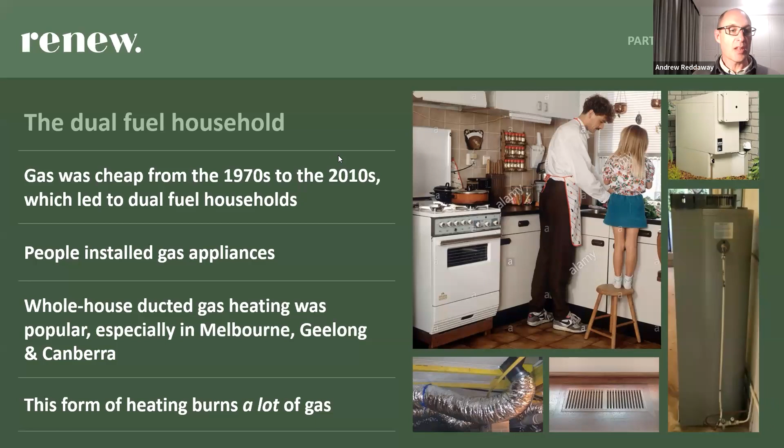So as I mentioned, Australia now imports almost all of its petrol, and the gas is now running out as well. So last winter, I think most of us are aware, there was a big energy shock in Australia with prices going up for electricity and gas for households and businesses. The reason that was most talked about in the media was geopolitical, so the war in Ukraine, all those sorts of factors. But an underlying factor is actually that the gas being produced in Southeast Australia is depleting, and there's not so much available anymore.

Also, we're exporting lots of gas, which is mostly from Queensland and New South Wales, which is not so easy to get down to Victoria when it's a really cold winter's day and heaps of gas is required. It's hard to suck that through the pipelines fast enough and down from the northern states.

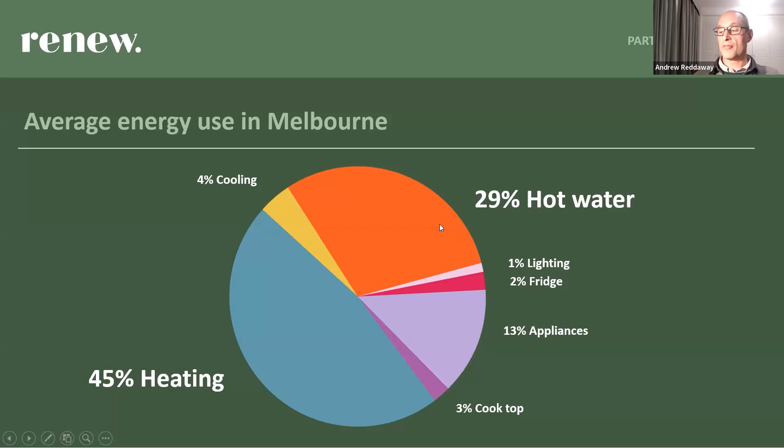But as a general rule, Melburnians would spend a lot of their energy for heating the home and cooling, not so much, but mostly heating. And also a reasonable proportion for heating their hot water for showers.

All right, so let's look at cost. So all electric homes compared to homes that use electricity and gas, what we call a dual fuel home. So yes, if you're choosing to go all electric, then your efficient electric appliances probably do cost a bit more to purchase and set up. But once they're there, the energy bills go down compared to a household that is using gas for heating and cooking and hot water. So over time, it generally is an economic choice to be all electric rather than dual fuel.

And it's not just because of the energy that's coming in through your electric cables and your gas pipes. It's also the supply charges. So even if you don't use any electricity, you still pay a supply charge just to have that grid connection. And the same with gas. And so if you look at that option of severing that gas connection, that could actually save you a few thousand dollars over 10 years, just for the right of having that connection, which is pretty significant. So Renew put together a report in 2019, which went into a lot of detail on this.

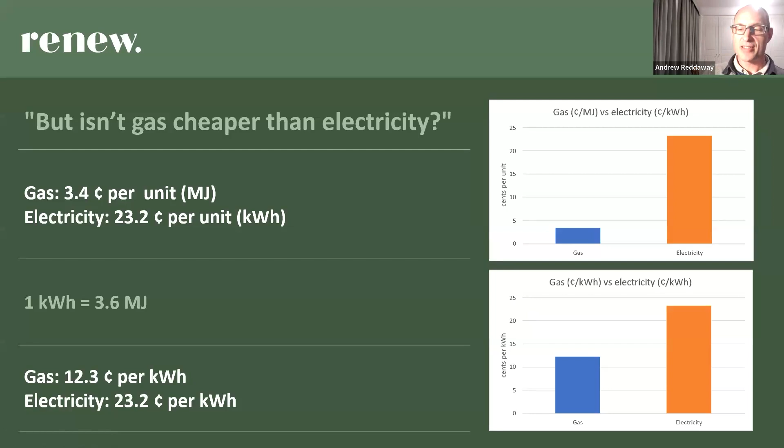Yeah, here we are. So the previous slide was only looking at per unit of energy coming in through your meter, but that's not what you really care about. What you really care about is how much heat gets into your home, either as hot water or as space heating.

So this is where the big differences come. If you're burning gas, then not all of the heat in that gas makes it into your home. You're always going to lose some heat that goes up the flue, or it gets lost into the air down the side of your house. On the other hand, with electricity, you don't lose energy. In fact, you gain a lot of energy, and I'll explain why later.

But you're effectively like 450% efficient with a reverse cycle air conditioner or a heat pump hot water system. It varies unit to unit, but roughly you're getting much more than 100% efficiency. I know it sounds like you're violating the laws of physics and thermodynamics, but it does actually work. I'll explain why later.

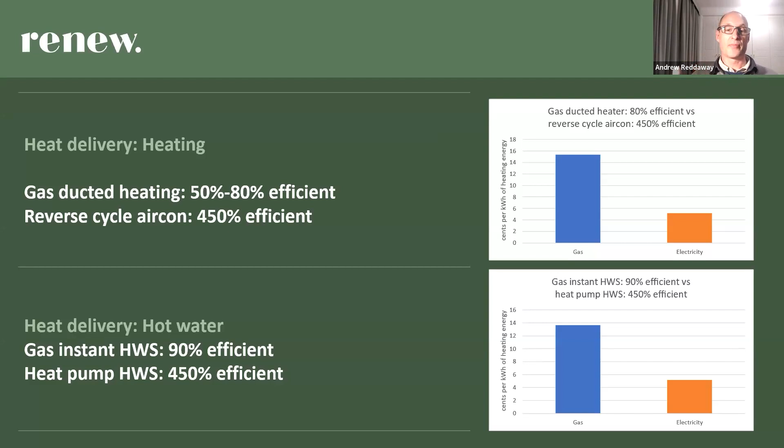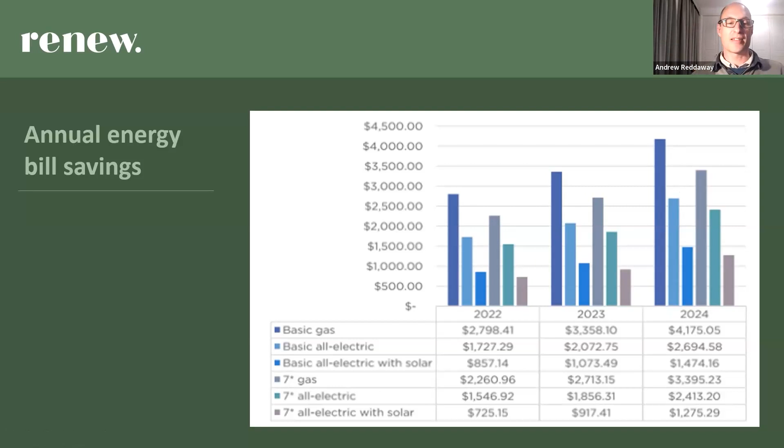And I think we're all aware that energy prices are rising, unfortunately. So these are some projections. For 2024, yes, gas is going to be more expensive. Electricity is also going to be more expensive, but you're still going to be saving with an all electric home compared to dual fuel. And in fact, your savings get bigger as both of those costs increase proportionally.

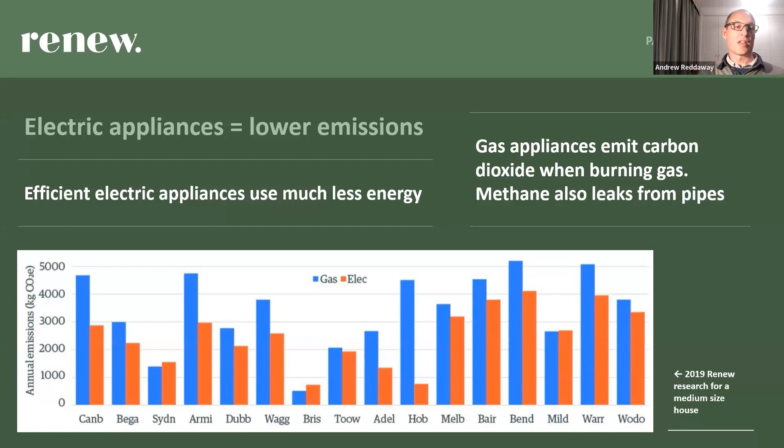Well, that's 2019, which is already 4 years old. And if you're installing an appliance now, that appliance is probably going to be there for 10, 15 years. So if you think about the lifespan of that appliance, what matters in terms of emissions is not just the picture now, but the picture throughout that lifespan. And things are changing. Gas is actually getting dirtier.

Previously we were sucking up gas out of a relatively small number of wells that were being drilled down into the seabed under Bass Strait. Now we're moving to unconventional projects, so that's coal seams and fracking. And we're talking much larger numbers of wells throughout all sorts of landscapes up in Queensland and in New South Wales. Comes with a whole bunch of environmental issues. So as time goes on, the emissions are going up per unit of energy from gas.

And electricity is getting cleaner. We've had Hazelwood Power Station closed down. We've had Liddell in New South Wales shut down just a couple of weeks ago. Eraring's going to close in a couple of years. There's been others that have shut down. So that energy is being replaced by wind, solar, energy storage.

If you install an electric appliance now, each year that it's operating, it's actually going to be running cleaner and cleaner in terms of emissions from the electricity that it uses. So if you compare 2030 projections to 2019, electricity from the grid is only going to be a little over a third of the emissions of what it was in 2019.

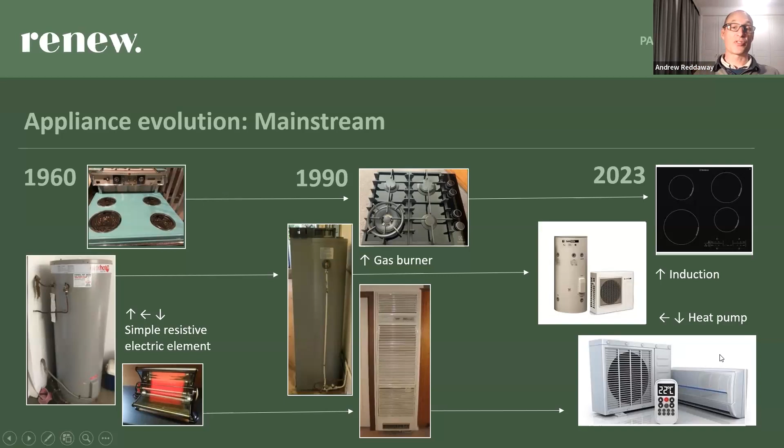And nowadays, what are the efficient options? We've got induction cooktops, and we've got heat pump technology for hot water and for space heating, just via a reverse cycle air conditioner. So heat pump, that's a bit of jargon. So what is it? Well, it's really this unit you've seen down the side of people's houses. Everything's down the side of the house, isn't it? So it's a heat pump unit. It's the outdoor part of a split system air conditioner.

And if you're using it for heating, which you can, it's using electricity, but all the electricity is doing is turning the machinery. You're not running that electricity and just burning it as heat. It's just spinning the equipment. So what the equipment does is it's sucking in air that's blowing around down the side of your house. It's extracting heat from that air and putting that heat into your air conditioner, so you can get heat into your home. So that's the opposite of what your fridge does.

So if you think about your fridge freezer in your kitchen, it's taking in air from inside the fridge freezer. It's extracting heat and blowing that out into the kitchen. So if you feel down the back of your fridge, you'll find that it's warm. That's the heat that's been taken out of the fridge freezer to keep your food cold. So a heat pump used for heating your house is doing the same thing, but in reverse.

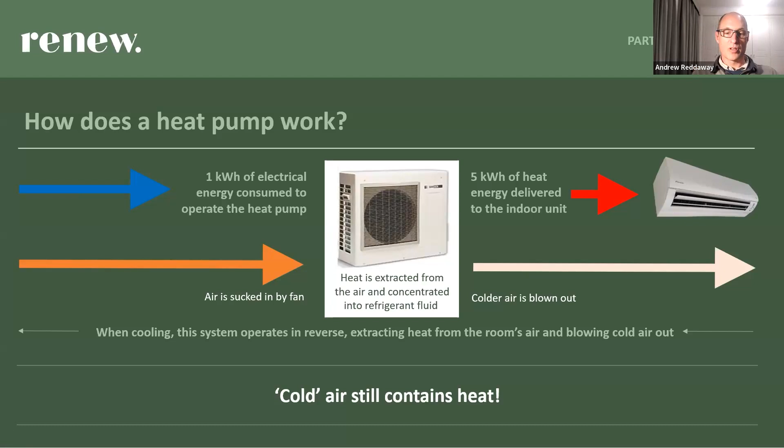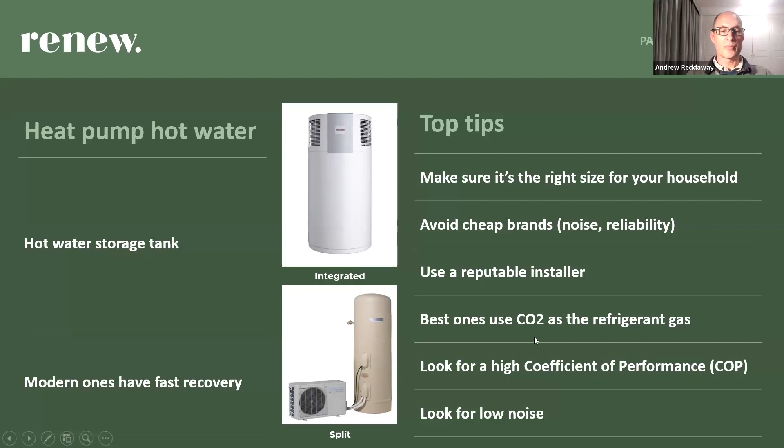So a split system air conditioner, you've got the inside unit and the outside unit, and you don't have ducts. You don't have air blowing through ducts. The heat's just being transferred through a thin pipe that goes through the wall, which is a much better way of doing it, because when you're blowing air down a duct, it takes a fair bit of electricity to run the fan to push it through, and you always have some losses. You have some leaks and gaps in the ducts.

Especially if you've got an old unit from the 1980s or something that's still installed, you'll probably find that the ducts are deteriorating, and you've got hot air blowing out in winter, cold air blowing out in summer. So you're actually trying to heat or cool the whole neighborhood as well as just your own house, which is a pretty tough ask.

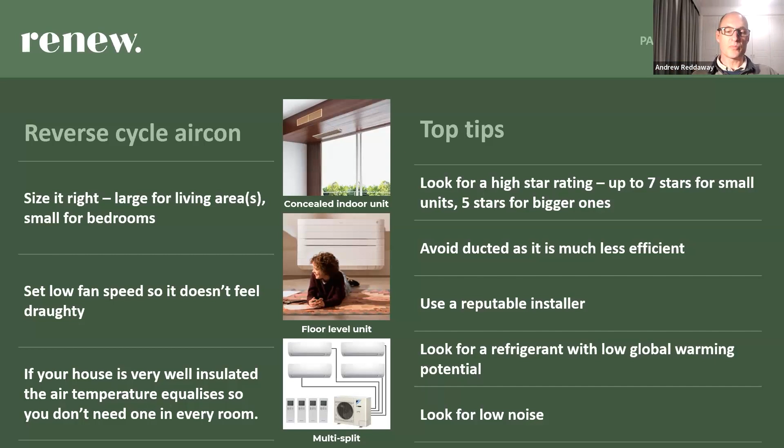And then induction cooking. So these are really good systems compared to the old style electric ones. They're really responsive. You can go from low power up to high power in a second. You've got really good control over the power, and it's actually heating the pot itself. So it's not really heating the cooktop; the cooktop only gets warm where the pot is sitting because it's only being warmed up by the pot. So safety is good, which can be important if you've got perhaps elderly people or kids that might be using the cooking.

Induction cooktop is powerful, and you don't have indoor air pollution. There have been some studies recently that have linked indoor gas cooking with childhood asthma, which is pretty concerning. You do have to make sure that your pots are compatible. The easy way to do that is to stick a fridge magnet on the base of your pot, and if it sticks and doesn't slide off, then your pot's going to work with induction.

Another consideration is you are going to have a dedicated new electrical cable connecting your induction cooktop back to your electrical switchboard. So that is going to require an electrician to do a bit of work. All right, so that's a rundown on the appliances that we'd recommend for efficient electric to replace gas options. So now let's talk about how you actually do it.

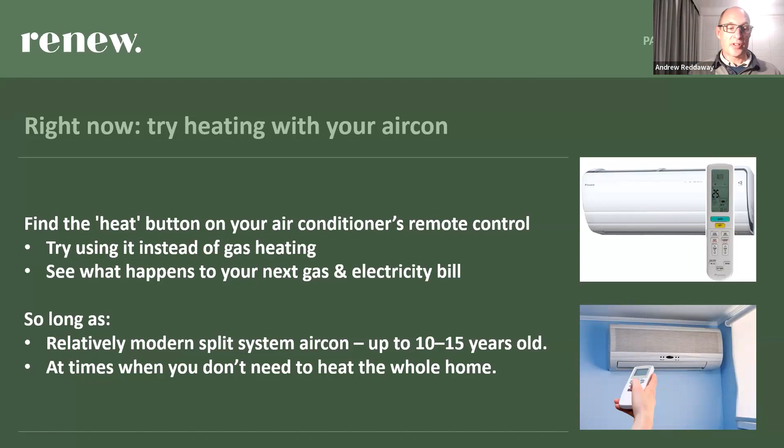Now, if you're building a new home or doing a major renovation, then really it's a no-brainer. Just don't put gas in. Just go all electric. And while you're doing it, make sure the insulation is good and the draught sealing. Any new home has got a star rating on it. Up to recently, the legal minimum has been a 6-star rating. That's going to change. The minimum is going to be 7 stars. That's as designed, by the way.

If the builders or the tradie subcontractors cut some corners and they don't put in the insulation as well as they should have, then even though it's designed for 7 stars, it may only perform as 6 stars or 5.5 stars or something. But if you're building new, try and get it well sealed, well insulated, and go all electric.

So Renew's done some research on this and compared the costs of adding that insulation and going for, say, 8 stars, compared to the extra bill savings over time. And it looks like 7 to 8 stars, if you're just looking at cold hard numbers for dollars, might be the sweet spot. You're accepting a bit of extra cost up front, and you're recouping that cost and earning returns through lower energy bills into the future.

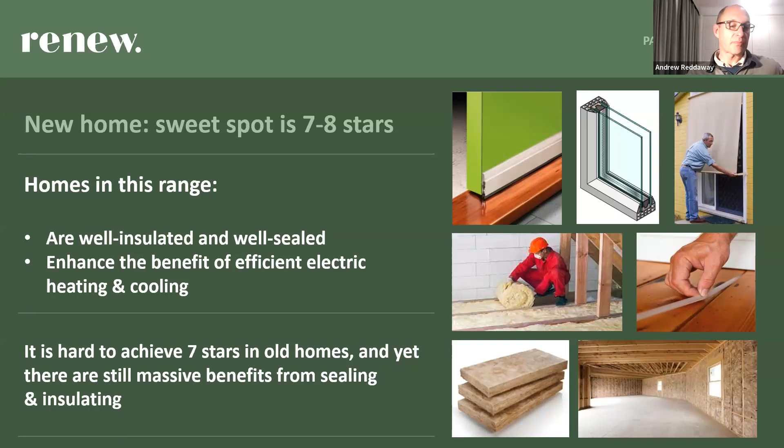Solar panels, really popular these days. Solar panels are so hot right now. And yes, they're great by themselves. They also enhance the benefits of getting off gas. Going off gas is great by itself as well, but when you combine them both together, you get even better effects.

You can go into this in heaps of detail, and we have entire webinars focusing on solar and home batteries. But the simple message is, as long as you've got a sunny roof and you're going to be staying in the home long term, then it's a good deal economically and environmentally to put solar panels on the roof. Once you do that, you're generating your own electricity, especially in the sunny part of the day, say 10 a.m. to 4 p.m. So that's when you would want to run your appliances as much as you can. Use your electricity.

Batteries, they have some benefits, but we'd probably still see them as a niche market at this stage. Still not economically compelling for most households.

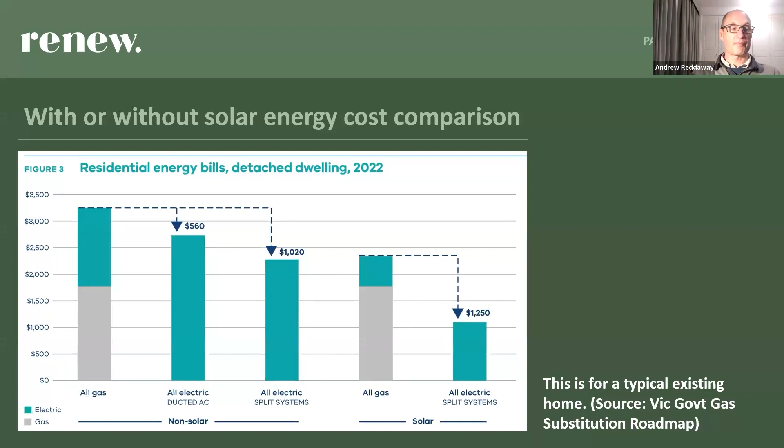Now, here's something to aspire to: closing your gas account. So once you've upgraded your appliances from gas ones to efficient electric, then it's time to call up your retailer that sends your gas bill and ask them to close your account.

Now, there's very different sorts of reports that we hear, experiences from different households. Some households, like my own, for example, we just called them up and said, "Oh, I would like to close the account." They said, "Yep, fine, close the account," and that was all that had to be done.

But there have been other cases, depending on the retailer that they're with and which location they're in, which company owns the gas pipes. Sometimes they are a bit difficult, and they say, "Oh, if you want to close gas, then you actually have to pay us to abolish your gas connection, and we have to dig up the pipes and remove them all." And there have been cases where it can all get a bit tricky.

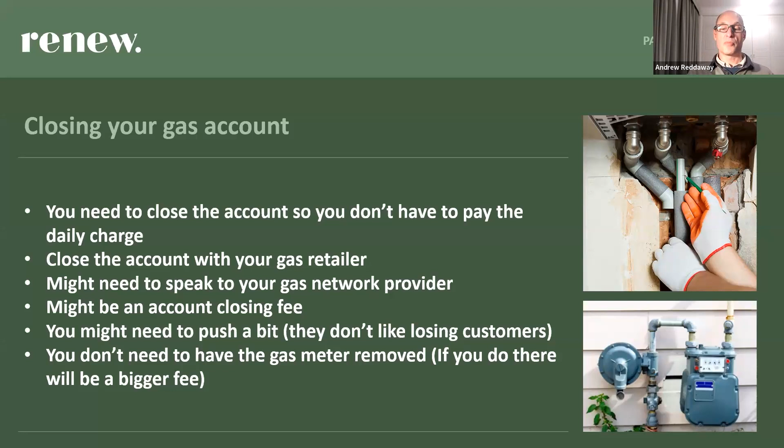So we'd recommend pushing back on that if they're trying to make you pay for getting off gas. And if necessary, I'd suggest getting in contact with the Energy and Water Ombudsman in Victoria. Raise a case with them and escalate it if necessary, if you feel like you're not being treated properly by the companies.

So all electric. So here we're talking about getting off petrol as well. So electric vehicles, yes, their prices are coming down, but they're still more expensive than an equivalent petrol car, but the running costs are a lot cheaper. And if you really want low cost transportation, then I'd suggest to have a look at electric bicycles as well.

So there's a Victorian government subsidy, so you can get $3,000 off an electric vehicle while the subsidy lasts. And there's also a benefit that's come in more recently. If you get a vehicle on a novated lease, so through your employer, where you don't have to pay up front, you're just salary sacrificing part of your salary to pay for your car, like effectively a car finance. That's actually a really good deal because there's no fringe benefits tax. So you can pretty much get your car as a tax-free item.

All right, so that was explaining the mainstream path to get off gas and go all electric. Now, there are some other options and considerations.

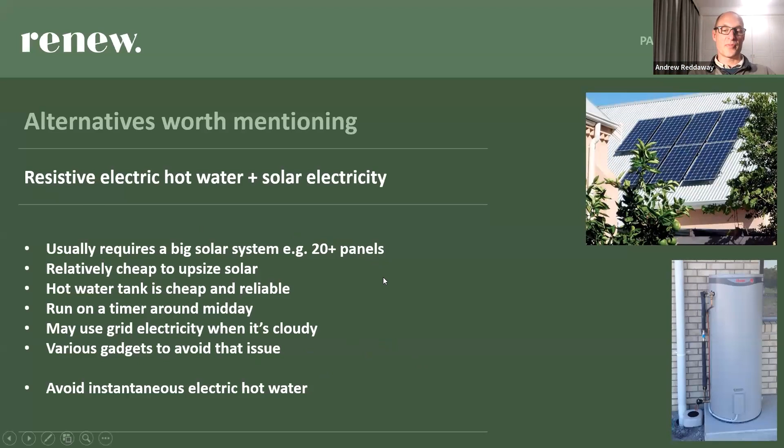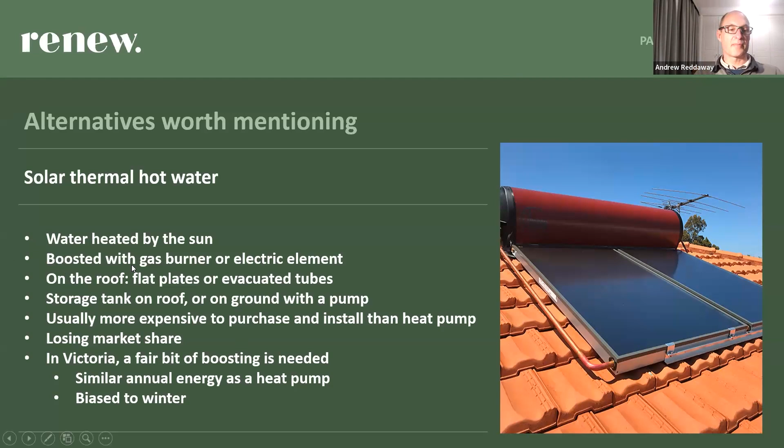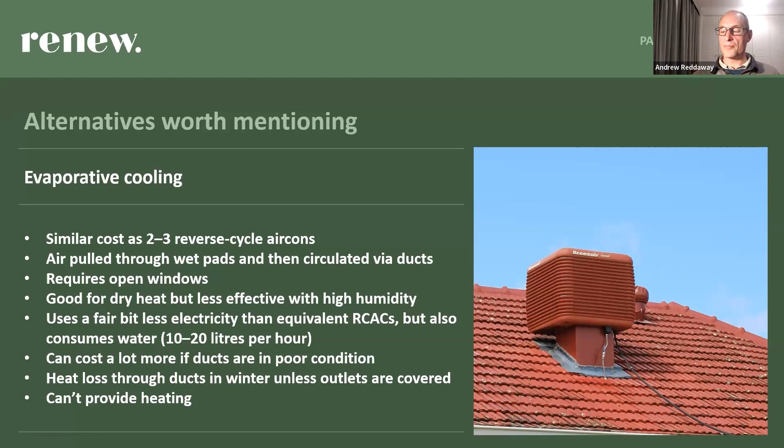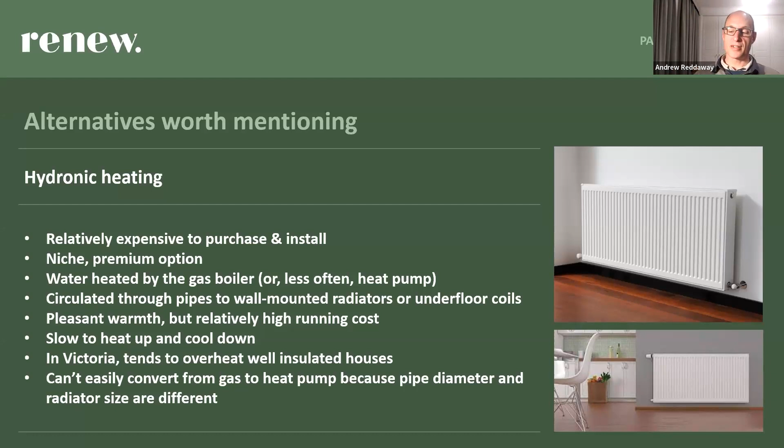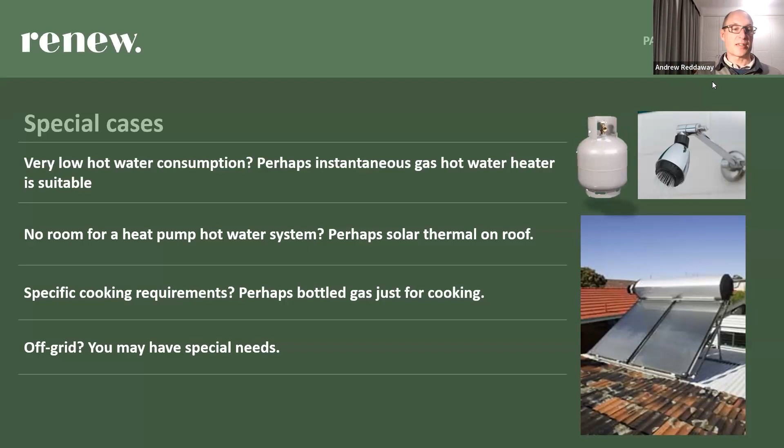Now, another one that we get is, what if there's a blackout, an electricity outage? So trees have fallen down on the power lines, perhaps. No one in your street has power. So isn't that going to be terrible if I'm an all-electric home? Well, yes, that's a case where your hot water and your cooking and your heating may be affected more than if you had gas.

But on the other hand, some gas appliances also have an electric component in them, like a ducted gas heating system. It's got that electric fan to blow the hot air down the ducts. So that's going to stop working in your electricity outage as well. With your hot water, if you've got a heat pump hot water with a tank down the side of your house, well, you've got that tank full of hot water that's going to stay warm for a couple of days. So hopefully your electricity outage won't last that long.

For cooking, there are workarounds. So barbecues, little camping stoves, that sort of thing. If your outages are only occasional, then that may well be enough to get you by. And there are also backup power options to keep electricity going in your house, even though your street is blacked out. So you've got uninterruptible power supplies that are like office batteries that you can use to keep computers running for a while. You can get petrol and diesel generators to fire up in an emergency situation.

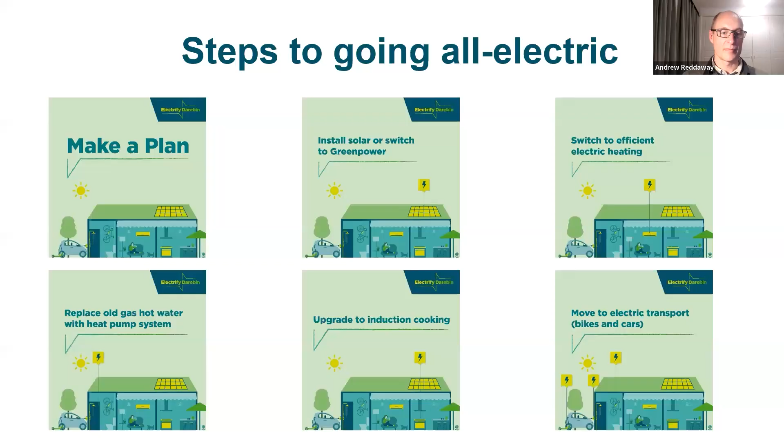Yeah. So as I had said earlier, the 4 councils that are bringing this presentation to you this evening are part of a bigger movement of many councils across Australia that have launched Go Electric campaigns. They often involve different steps to going all electric. And just as Andrew said earlier, we really want to stress that the first step is making a plan.

You don't want to get into a situation where your hot water heater dies and you don't know the options. It's going to take you a little while to both research and then find one that's available. And often with the supply chain issues that have been happening throughout the world, it might be a few weeks before you can get the one that you want. So it's a really good idea to start making a plan, looking at your finances and doing what you can based on what things cost and when you might have the money.

But then the steps are installing solar, switching to efficient electric heating, replacing gas hot water with heat pump systems, upgrading to induction cooking, and then moving to electric transport. Those aren't in any specific order, but those are the steps. Can you advance the slide, Andrew?